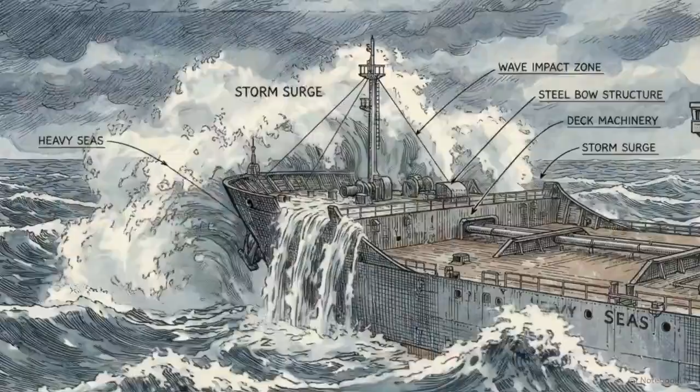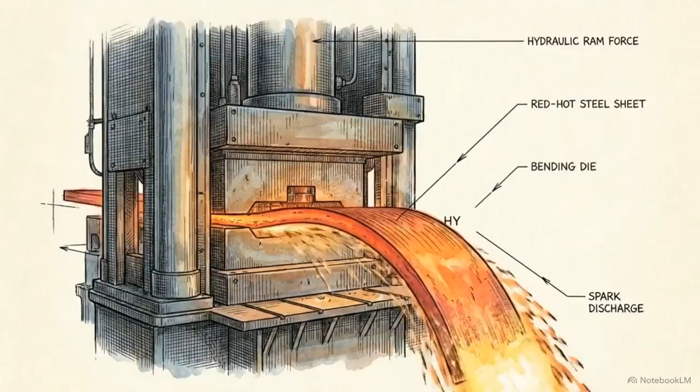A stark contrast exists between the bureaucratic reality of London boardrooms and the violently corrosive physical environment where commercial ships actually operate. This creates a central paradox. A static legal text must effectively govern the millimeter-level structural integrity of a 300-meter steel asset navigating extreme weather conditions. SOLAS resolves this by operating as a dynamic engineering engine, where international mandates literally bend and shape the steel of the global fleet.

Looking at the vast scale of this tanker, Chapter II-1 of SOLAS serves as the direct mandate for its physical geometry, dictating the structural subdivision, stability requirements, and construction standards of the hull. Chapter 1 then acts as the administrative enforcer, dictating a strict temporal matrix of continuous surveys and inspections. True seaworthiness exists exclusively at the intersection of the engineering mandates of Chapter II-1 and the life cycle oversight of Chapter 1.

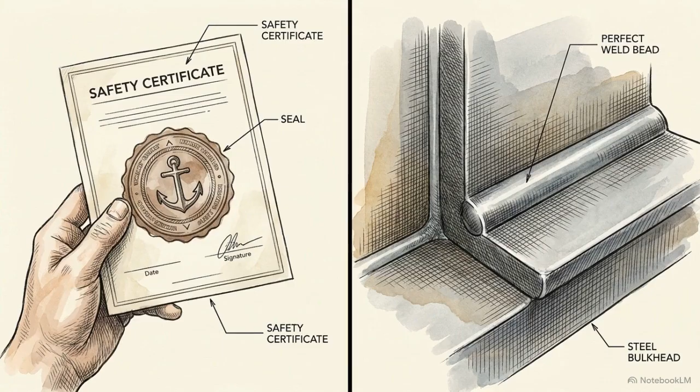We will deconstruct how SOLAS dictates a ship's design for a 25-year lifespan and forces owners to prove its integrity through rigorous documentation. Compliance is a continuous physical state. A vessel is only as compliant as its last survey and its current geometric reality. Before a ship can be legally surveyed, its geometry must be rigidly codified.

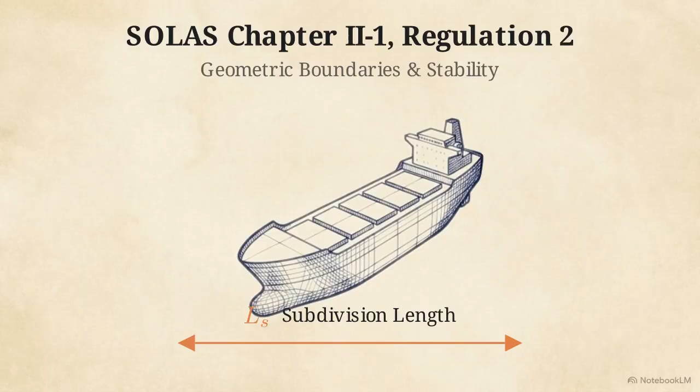This 3D wireframe illustrates the definitions laid out in Chapter II-1, Regulation 2. The subdivision length is the greatest projected molded length at or below the decks that limit vertical flooding. This length is capped by the forward and aft terminals, establishing the strict longitudinal boundaries of the vessel. The deepest subdivision draft, highlighted here, corresponds to the summer load line. This serves as the critical baseline for calculating intact and damaged stability.

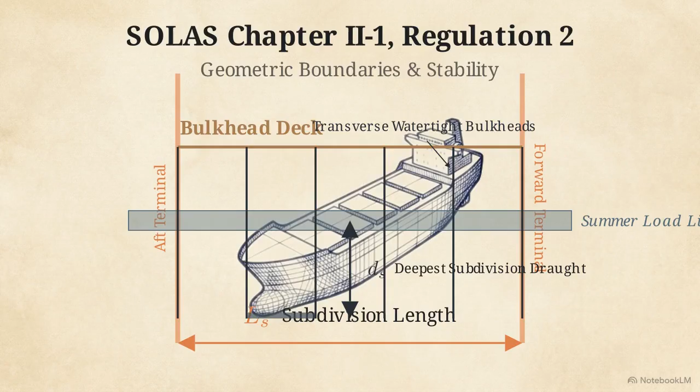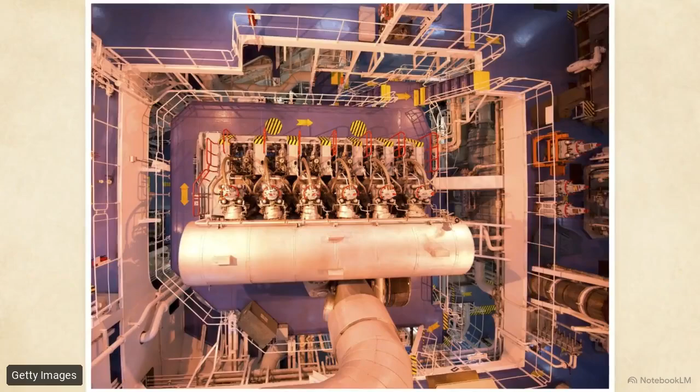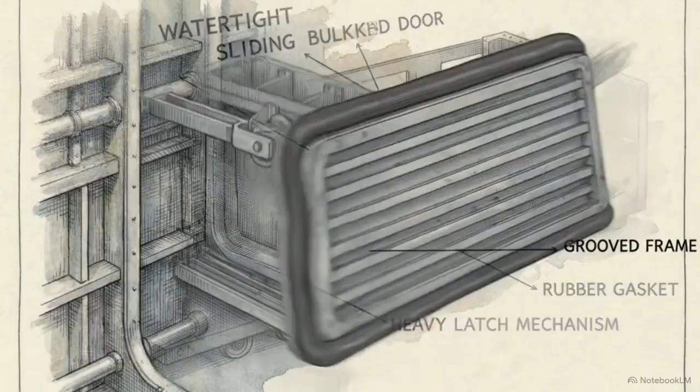The bulkhead deck is the uppermost deck to which transverse watertight bulkheads are carried. Its function is to contain catastrophic flooding within specific vertical parameters. Regulation 2.15 defines machinery spaces as strictly isolated zones containing main propulsion. They are specifically designed to contain mechanical failures and prevent fire from spreading. The term watertight is a legal definition requiring scantlings capable of preventing water passage in any direction under specific heads of pressure. These precise geometric definitions transform a complex physical asset into a standardized, calculable, and legally enforceable model.

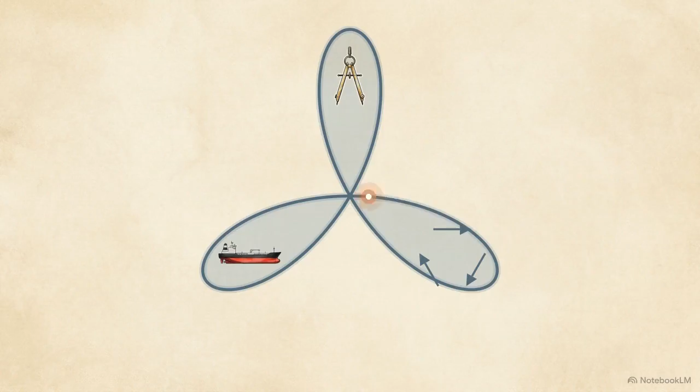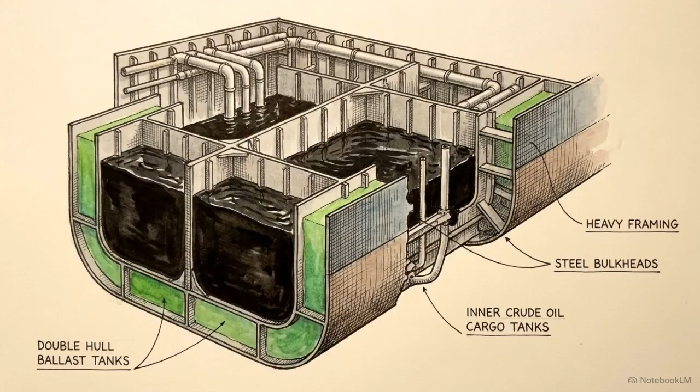Regulation 3-10 introduces goal-based ship construction standards, representing a shift from rigid checkbox rules to comprehensive life cycle engineering. Ships must now be explicitly designed for a specified design life, ensuring structural integrity and environmentally safe recycling for a period typically spanning 25 years. Regulations 3-2 and 3-11 establish strict performance standards for protective coatings in dedicated seawater ballast tanks and crude oil tanks. These coatings must be applied during initial construction. Their purpose is to prevent mid-life structural failure caused by invisible internal corrosion.

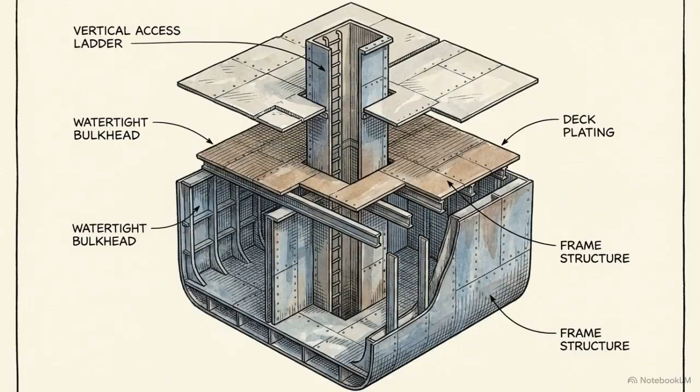Regulation 3-6 governs the physical accessibility of the vessel, requiring safe access to and within cargo areas and ballast tanks. It is illegal to build an enclosed space on a commercial vessel without designing a permanent, safe route for future human surveyors to enter it. The exact geometric requirement dictates that horizontal openings and hatches must have a minimum clear opening of 600 by 600 millimeters to allow a surveyor wearing a self-contained breathing apparatus to enter.

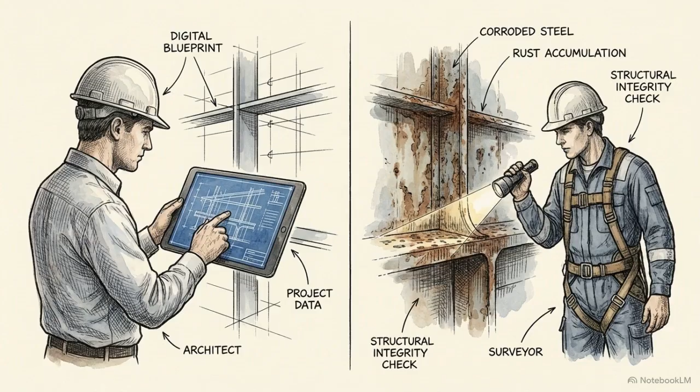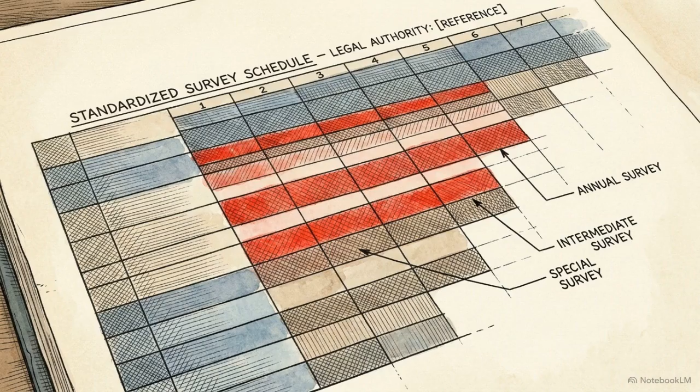These access routes must be documented in a mandatory ship structure access manual, approved by the administration and kept permanently on board. Chapter 2-1 forces architects to build ships that facilitate and survive their own future inspections. Once the geometry is set, the physical engineering requires strict administrative oversight to maintain the right to sail. Chapter 1, Regulations 7-10, lay out the harmonized system of survey and certification.

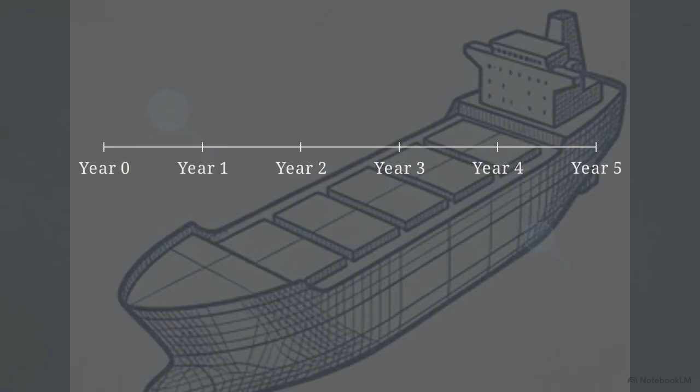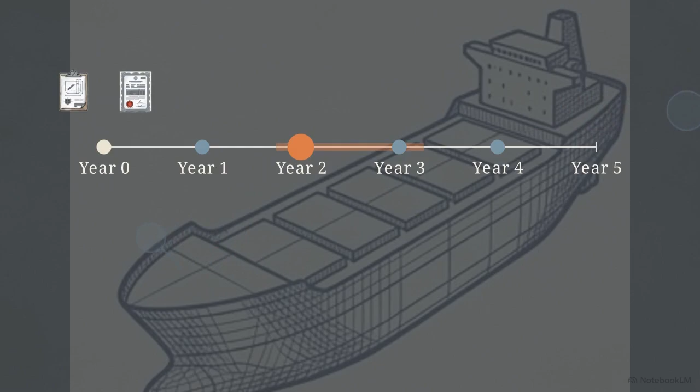This timeline visualizes the baseline 5-year compliance cycle required to maintain a cargo ship safety construction certificate. The initial survey occurs before the ship is put into service. It verifies that all structures and machinery perfectly match the blueprints approved under Chapter 2-1. Annual surveys are required within 3 months of the certificate's anniversary date to ensure the ongoing maintenance of all required equipment. Between months 21 and 39, an intermediate survey replaces one annual survey, requiring a more intense inspection of the steering gear, boilers, and electrical installations.

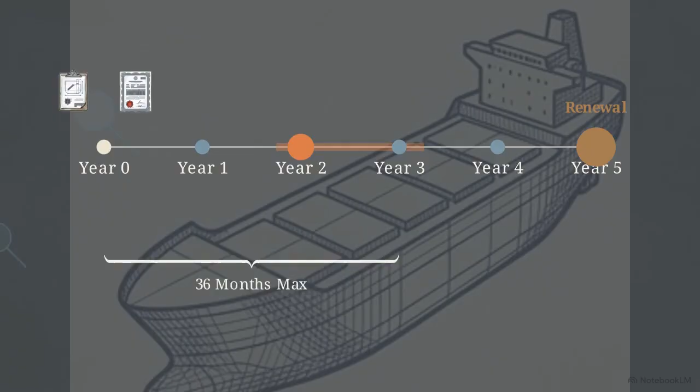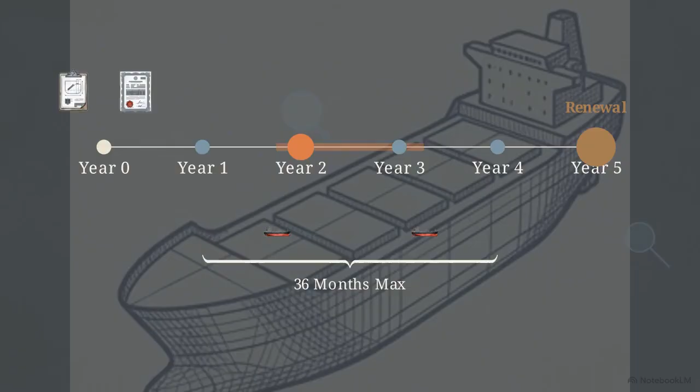The 5-year cycle culminates in the renewal survey, a massive, comprehensive inspection that renews the vessel's legal status for another half-decade. Regulation 10.A.V introduces mandatory outside bottom inspections. At least 2 are required every 5 years, spaced no more than 36 months apart. This specific requirement forces operators to regularly pull massive steel assets entirely out of the water for close-up structural review.

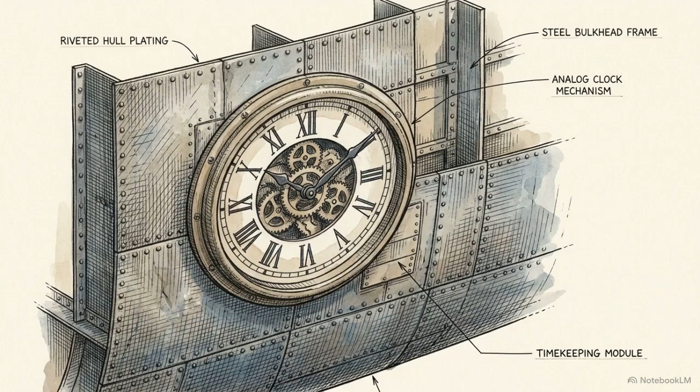Between these scheduled nodes, Regulation 11 requires the maintenance of conditions. If an accident occurs or a defect is discovered that affects the safety of the ship, the master must report it immediately, which can trigger an unscheduled survey. The surveyor on the ground operates as the ultimate arbiter, verifying that the physical condition of the steel matches the particulars of the certificate. The HSSC matrix weaponizes time. It forces the physical ship to continuously prove its geometric design intent to global authorities.

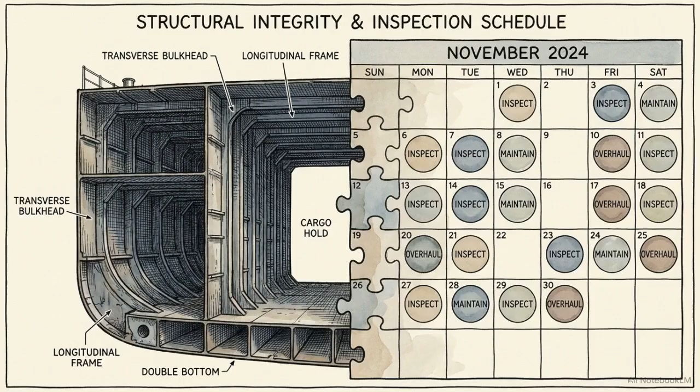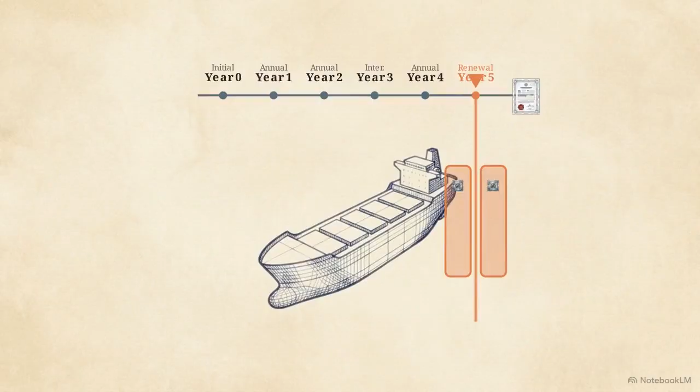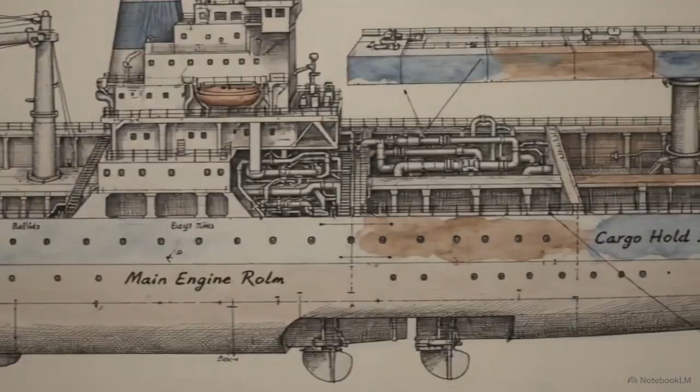The physical engineering requirements of Chapter 2-1 and the temporal matrix of Chapter I operate as a single interdependent system. By applying the 5-year survey timeline directly onto the ship's 3D geometry, the interaction becomes clear. The goal-based standards ensure the ship can be inspected, while the survey matrix ensures it will be inspected. As marine technology evolves, the expanded Maritime Safety Committee will use Article 8 to tacitly adapt the code to match new physical realities. This produces a continuous, unrelenting cycle in the world of global shipping operations: design, build, inspect, adapt, and repeat.

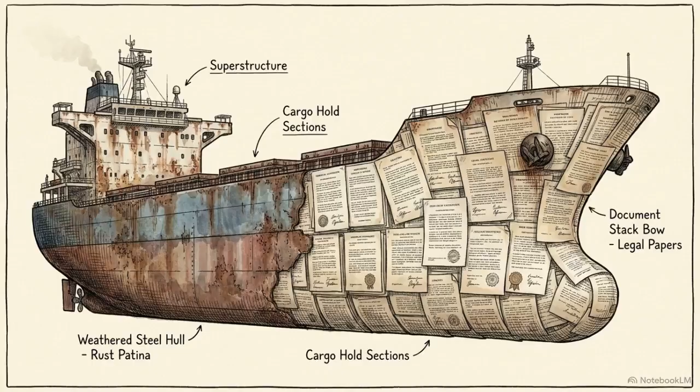A commercial vessel is constructed out of its legal and documentary history as much as it is built from steel. Without a valid cargo ship safety construction certificate and an up-to-date ship structure access manual, the physical asset is legally paralyzed and unable to trade. In the eyes of international maritime law, true seaworthiness is the flawless, ongoing execution of both physical geometry and temporal inspection.